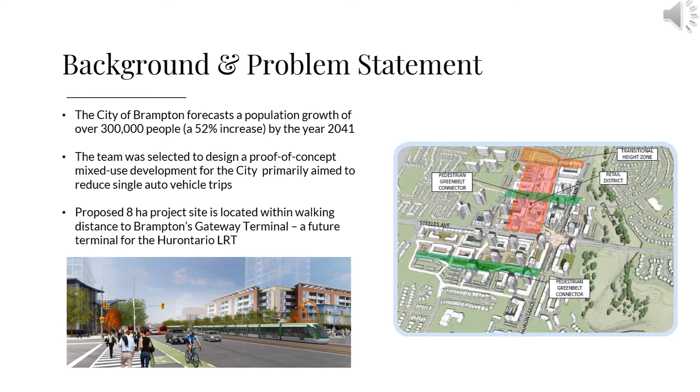The City of Brampton is poised for significant short and long-term growth as they continue to combat rapid population increases within the GTA. Constructing traditionally low-density, auto-dependent communities, the city's current development practices have put a large strain on the existing transportation network. UVG was selected by the City of Brampton to create a mixed-use development prototype which combats this problem. The team chose to pursue a site within Brampton's Gateway, an area with existing connectivity limitations and issues, with plans for major future development.

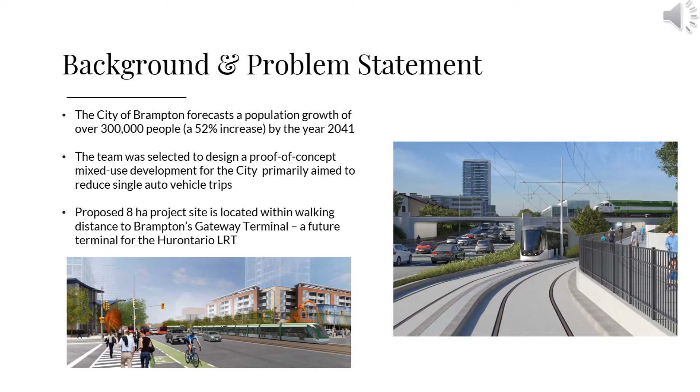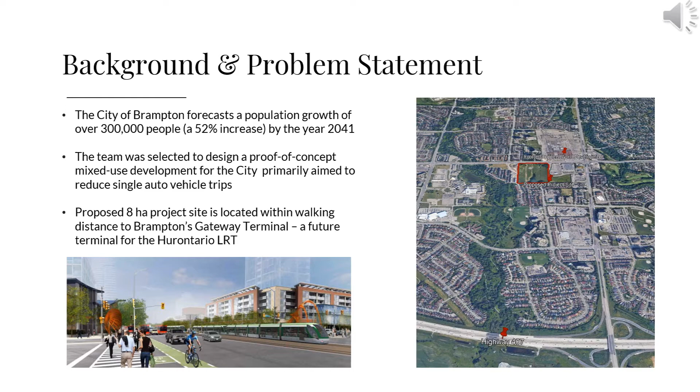The development centers around the construction of the Hurontario LRT, planned for completion in 2024, which will serve as an essential connection from Brampton to Mississauga and Toronto. The selected 8-hectare project site is located on Steeles Avenue, within walking distance to the future LRT's Brampton Gateway Terminal, in addition to the proposed Shoppers World mega development.

UVG set out to achieve a total of 4 key objectives. Firstly, UVG believes that to change human transportation behavior, the context of where all transport journeys start and eventually end is a critical component, so the team aims to minimize residential auto vehicle trip generation on site. The next objective was to maximize carbon sequestration through the incorporation of low-impact development. Next, our third objective involved creating healthy communities within our site. Finally, the team quantified low-impact development and servicing costs.

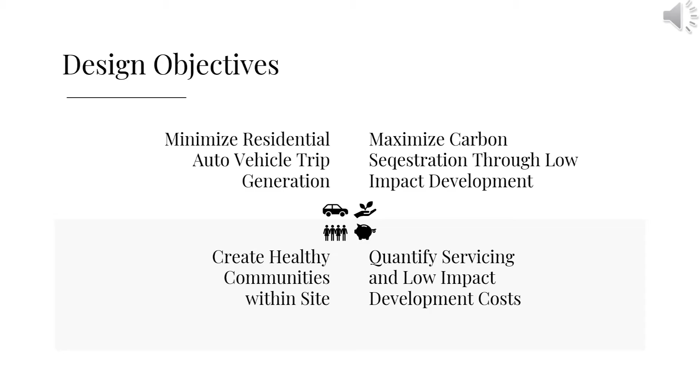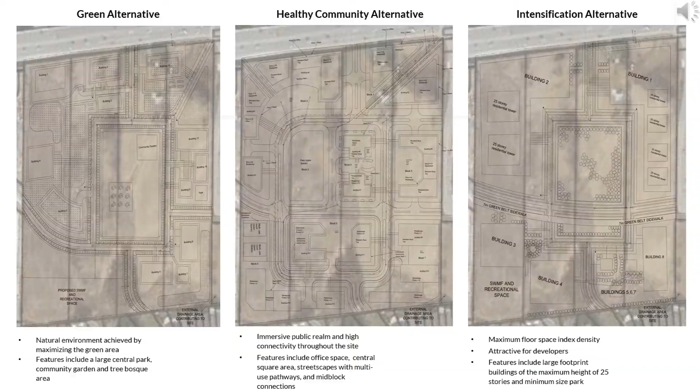UVG focused on creating mixed-use developments with varying combinations of complementing land uses. The team took the approach of creating thematic alternatives, with each targeting certain objectives to a greater degree. These included a green theme, focused on preserving the natural environment and maximizing green area, a healthy community theme, focused on maximizing public realm and ensuring integration and connectivity throughout, and an intensification theme, focused on maximizing the site area developed. At the end of Phase 1, it was recommended that the City of Brampton adopt the healthy community alternative.

Through in-depth research of various City of Brampton documents and programs, it is evident that residents desire a clear sense of belonging in their neighborhoods with an aesthetically pleasing environment, improved transit connectivity, and diverse land uses. Thus, healthy communities are at the forefront of the city.

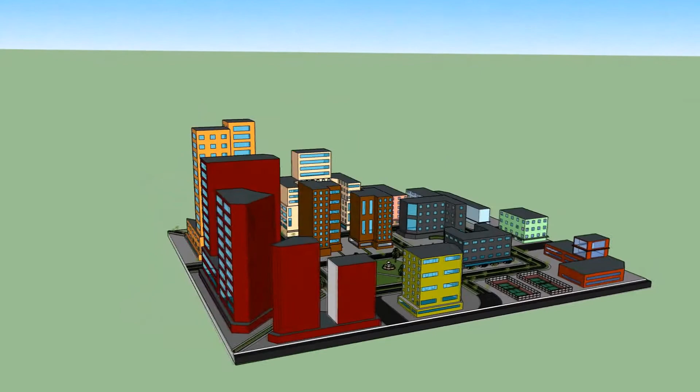Welcome to a new vision of mixed-use developments. UVG has designed a 3D model of our planned development to help illustrate the key features which make our site stand out.

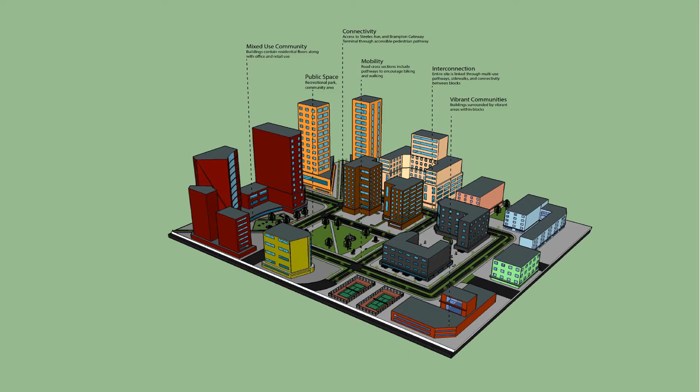The major key feature themes include the element of a mixed-use community, public spaces provided to residents, the connectivity and mobility within our development, the interconnectivity between blocks with the grid street pattern followed, and the vibrancy provided to the development with interesting features within blocks.

To begin, some of the development's various features can be highlighted. This includes the site's park area, which serves as a way to provide recreational opportunities to residents, as well as target UVG's goal to prioritize green spaces within the community.

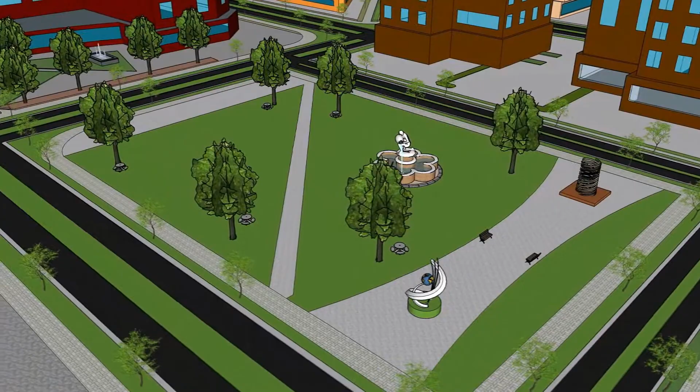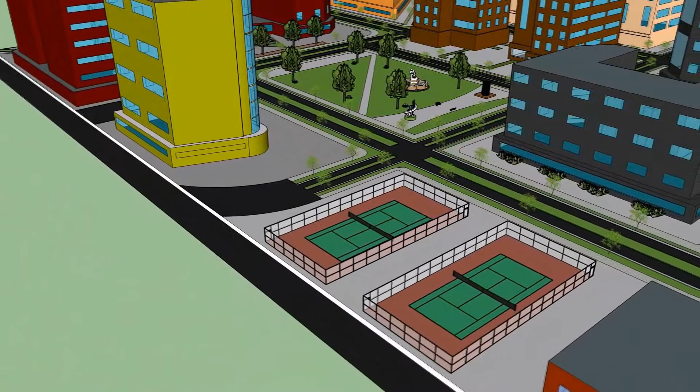Along with this, the site includes an urban plaza area, along with outdoor courtyards to showcase connectivity and vibrancy. One of UVG's goals was encouraging an active lifestyle, which is done through the inclusion of multi-use courts along with rooftop patios and amenities such as green roofs and safe gathering areas.

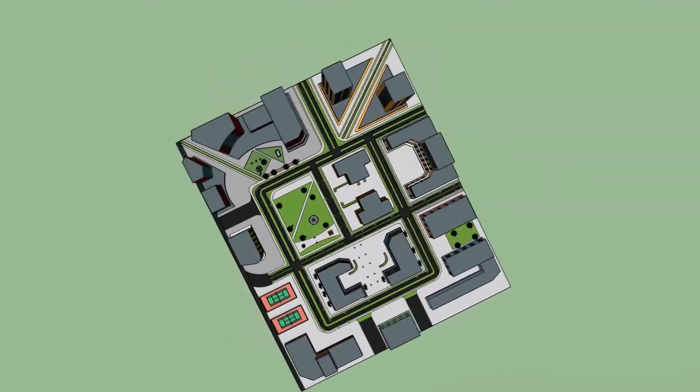Next, let's take a look at how our team prioritized connectivity with features that promote mobility and interconnectivity within the site. To promote different modes of transportation, such as walking and cycling, the team included multi-use trails and sidewalks throughout the site within the road cross-section.

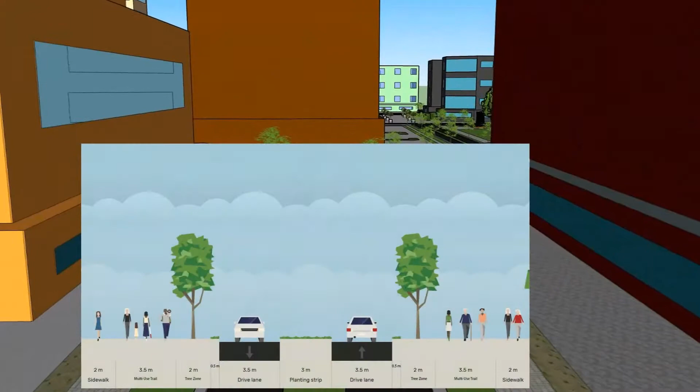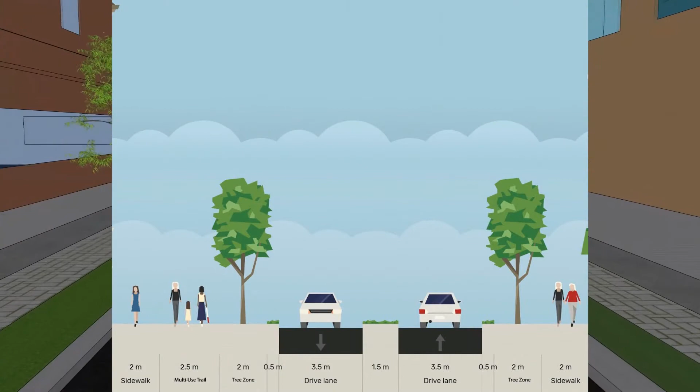There are a total of 4 different types of road cross-sections. First is a main road with a 26-meter right-of-way, which includes a multi-use pathway and sidewalk. Second is the secondary road cross-section, which is a 20-meter right-of-way, including a multi-use pathway and a sidewalk.

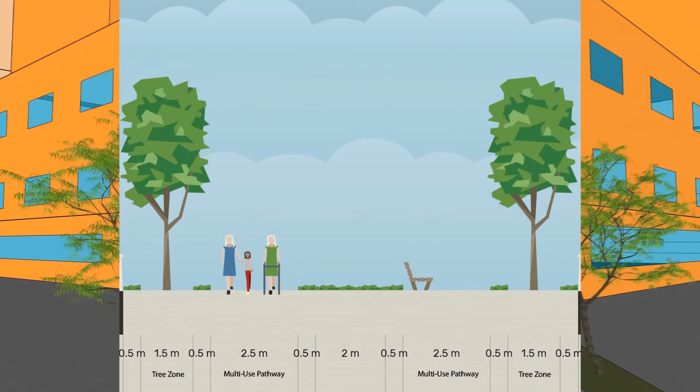Also, there are 2 pedestrian promenades at the top right and top left of the development. These pathways provide easy access to Steeles Avenue, located north of the site, for pedestrians and cyclists to easily connect to the Brampton Gateway Terminal.

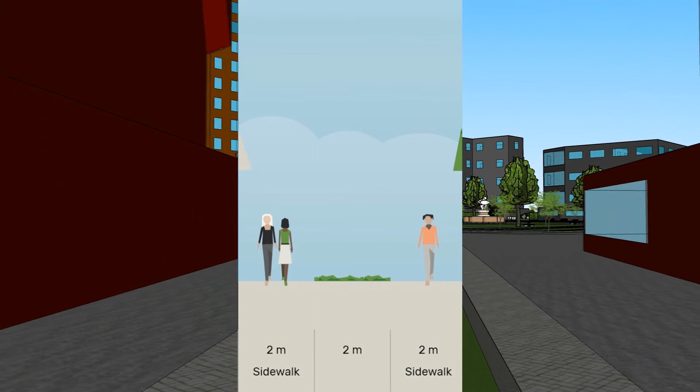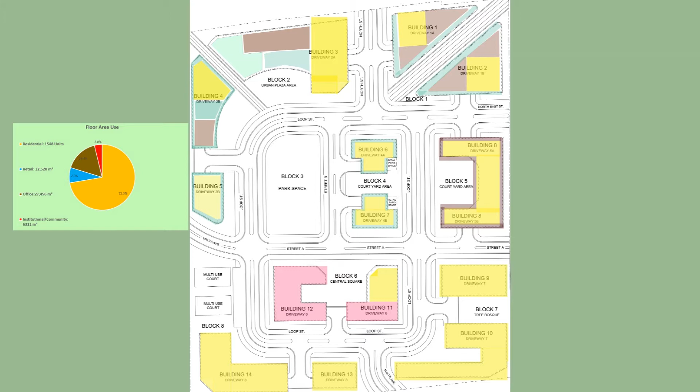Now, let's take a detailed look at a development from the ground up. To begin the design for all underground infrastructure, grading was completed using a Civil 3D model based on existing LiDAR data for the site provided by City of Brampton GIS. The grading strategy is shown in this slide, with flow arrows indicating a general drainage pattern from northeast to southwest.

The chosen design relies heavily on matching into existing site topography as to minimize cut and fill, and was constrained based on 7 proposed connections to existing roadways and pedestrian infrastructure. Finally, a stormwater management outlet design for major storm events was created with maximum surface ponding depths near the infiltration chambers. Overflow is designed to spill onto Malta Avenue at the west end of the site.

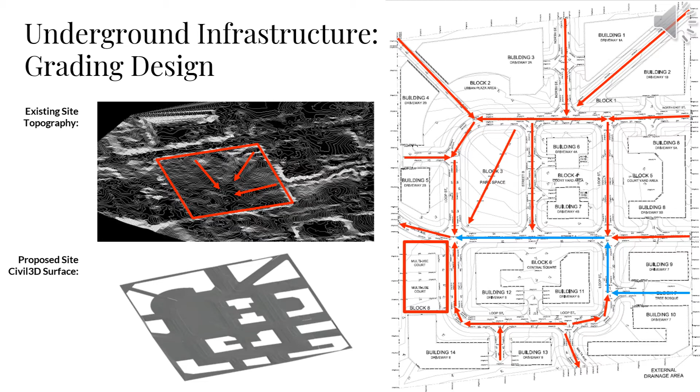Relating to the site's sanitary servicing, UVG first defined all internal building details, including the number of units and the areas of retail, commercial, and office space within. From this, the sanitary system was designed based on guidance from the Region of Peel Public Works Sanitary Sewer Design Criteria. Finally, the system was modeled using a design sheet with 12 catchments.

The total flow exiting the system is 60.23 liters per second to an existing 450 mil stub located on Malta Avenue. Overall, the system consists of 16 manhole structures, over 740 meters of 250 and 300 mil pipe, and approximately 520 meters of service laterals.

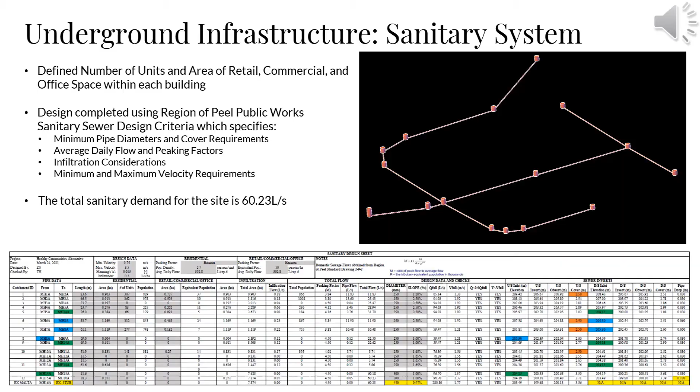Next, the development's water distribution system will be discussed. The drawing on the right shows the water distribution plan and subsequent hydrant coverage throughout.

Demand calculations have been performed based on requirements within the Region of Peel Public Works Water Main Design Criteria, as summarized at the bottom of the slide. Fire flow calculations for the site's largest building were also completed using the Ontario Building Code and the Fire Underwriter Survey. Finally, given the 900mm trunk water main present on Steeles Avenue, UVG has assumed the listed demands can be adequately provided.

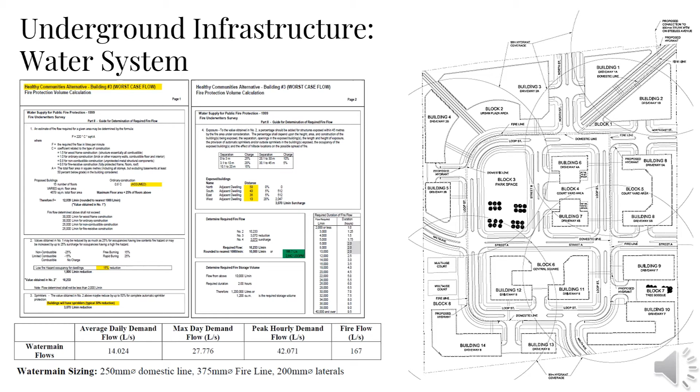However, UVG understands this would need to be confirmed with the region, and an internal network would need to be completed to ensure adequate water pressure throughout the development.

For storm servicing, the system was designed based on guidance from the Region of Peel Public Works Storm Sewer Design Criteria. The design considers 52 catchment areas created based on the grading plan, and includes consideration for an external 2.2 hectare grassed area currently draining onto the site.

Storm sewer design sheets were created for the development based on 10-year and 100-year storm events. Overall, the system consists of 52 various structures and contains over 1.2 kilometers of sewers.

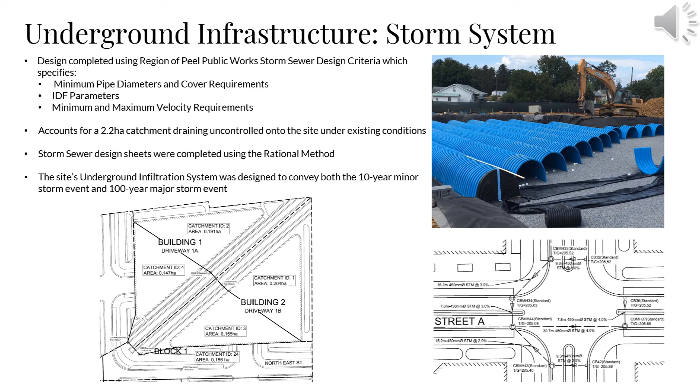The site's infiltration chamber system is designed to provide 3,000 cubic meters of storage, in addition to the 600 square meters of proposed green roofs.

Next, UVG has chosen to implement LID technologies into the proposed development in the form of green roofs, curb inlets, and an underground stormwater infiltration system. To guide the design of LID technologies, the Sustainable Technologies Evaluation Program STEP wiki was used.

As seen on the right of the slide, initial servicing costs total to approximately $6.7 million. On the left is a summary of the lifecycle cost analysis completed for the green roofs. These results have been provided to be transparent with the full asset management cost to the city.

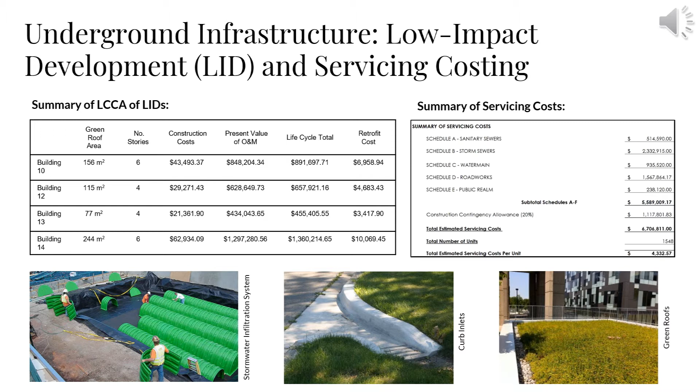Now let's transition to grade level to discuss the transportation feasibility of the site. UVG completed a traffic impact study for the proposed development to ensure the existing road infrastructure in the vicinity of the site can sustain the development-generated traffic in the 2026 horizon year.

UVG analyzed operations at 14 intersections, as shown on the right-hand side, during the weekday AM and PM peak hour and Saturday peak hour. The analysis was completed for 3 scenarios: existing conditions, representative of 2019 pre-COVID traffic levels; future background conditions, representative of traffic levels in 2026 pre-construction; and future total conditions, representative of traffic levels in 2026 with the site built and occupied.

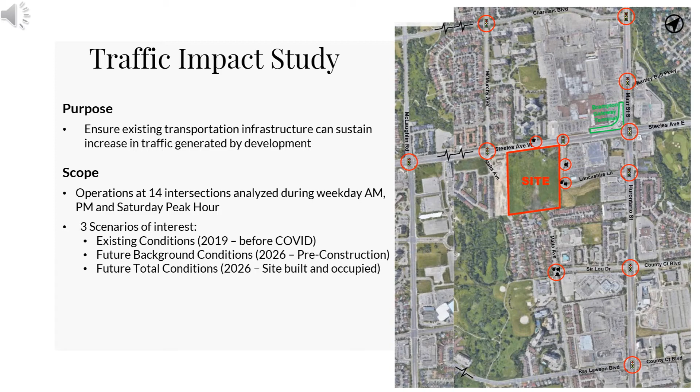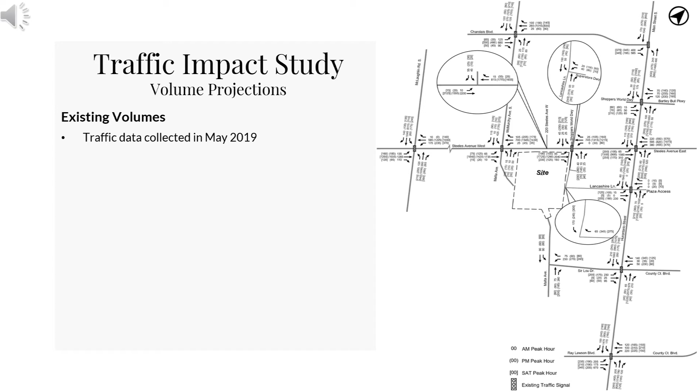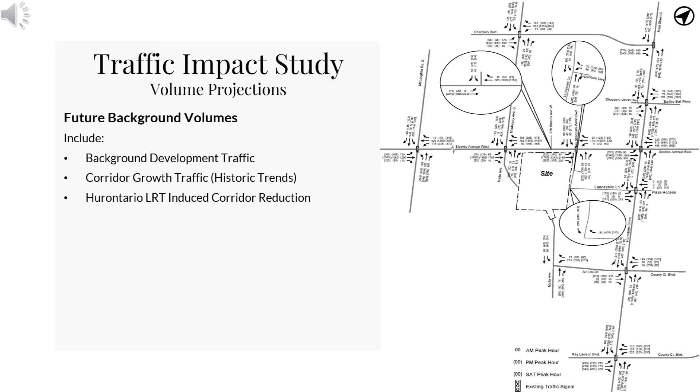Next, future background traffic volumes are forecasted, which consist of existing traffic volumes in addition to traffic generated by background developments, growth in traffic levels along corridors based on historic count data, and lastly, an adopted reduction along the Hurontario Main Street corridor to capture the effects of the Hurontario LRT on mode choice changes and redistribution of traffic to alternate routes.

The vehicle traffic projected to be generated by the site was determined based on a combination of trip generation rates from the ITE Trip Generation Manual and review of trip generation rate data for developments sharing a similar transportation context. The resulting vehicle trips were then adjusted to account for interaction between proposed mixed land uses, future Brampton mode share forecasts from their transportation master plan, and pass-by trips expected for the retail uses.

The development is forecasted to generate 1,075, 1,230, and 1,195 two-way vehicle trips during the weekday AM, PM, and Saturday peak hour, respectively. The forecasted vehicle trips were then assigned onto the local road network for each land use based on prevailing traffic patterns and trip distribution analyses completed using 2016 TTS data.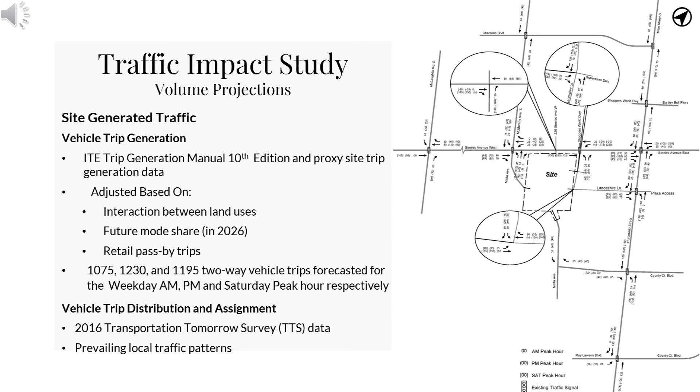Finally, the future total traffic volumes were determined by adding the site-generated traffic volumes onto the future background volumes. The resulting projected volumes were used for modeling purposes.

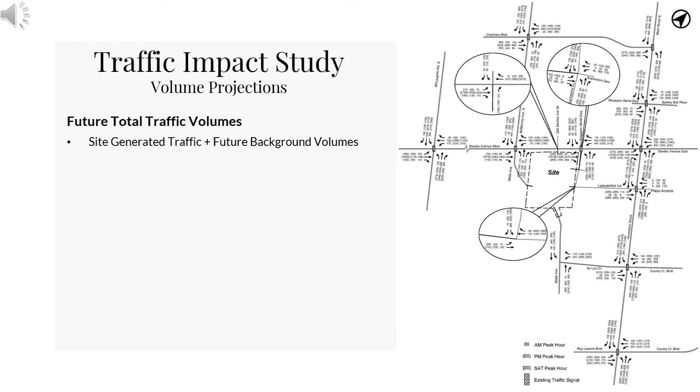PTV Vistro 2020, using the Highway Capacity Manual methodology, was used to model and analyze all 14 study area intersections during the peak periods for all three scenarios. The volume to capacity ratio indicates the capacity utilization for each movement at an intersection. A V over C of 1.0 for a particular movement indicates that movement is operating at its theoretical capacity.

After making the timing updates, UVG verified that all movements at all intersections in future total conditions are expected to operate at a V over C below 1. As such, UVG can conclude that the existing roadway infrastructure and geometry can adequately sustain the traffic generated by the proposed development and continue to operate at acceptable levels in 2026.

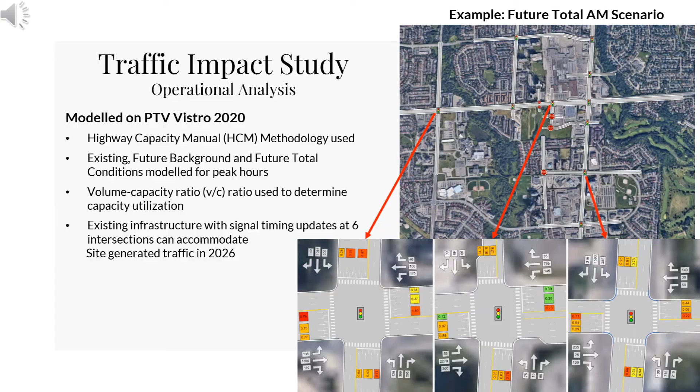UVG has been committed to bringing the vision of a high-quality, vibrant, and connected community to life within this transit-oriented neighborhood. Tremendous focus was put into developing an active community that encourages alternate modes of transportation through diverse land uses.

Ultimately, UVG imagines a 15-minute neighborhood, bringing essential amenities to residents' doorsteps, minimizing residential trip generation. The development innovatively utilizes LIDs to maximize carbon offset and boasts a healthy community with indoor and outdoor opportunities for social gatherings and wellness.

Overall, the development will act as a vein to facilitate the nearby Hurontario LRT, acting as the heart of the Brampton Gateway area.